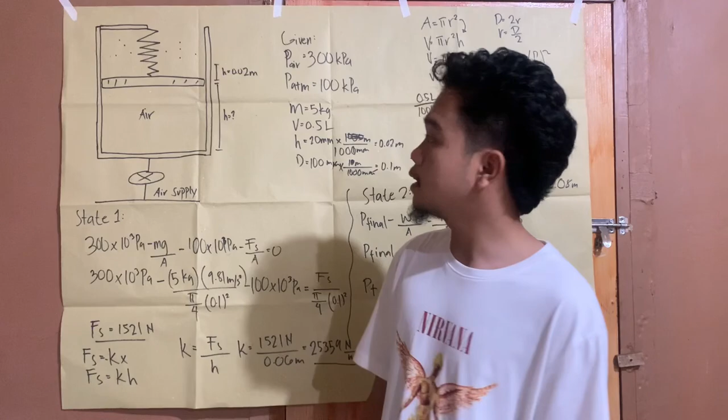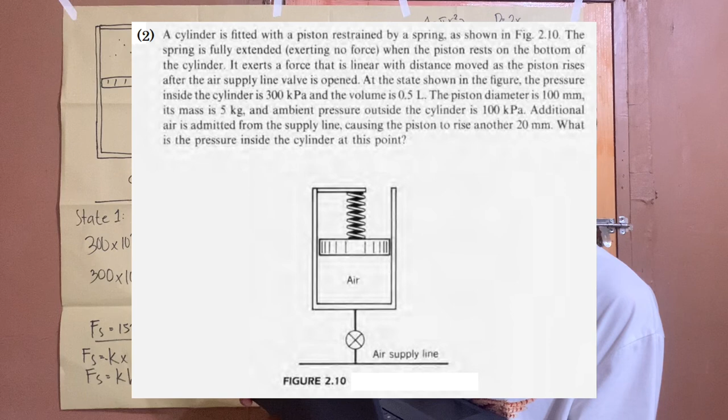In problem 2, here's the question: a cylinder is fitted with a piston restrained by a spring as shown in the figure. The spring is fully extended, exerting no force when the piston rests on the bottom of the cylinder. It exerts a force linear with distance moved as the piston rises after the air supply line valve is opened. At this state shown in the figure, the pressure inside the cylinder is 300 kPa and the volume is 0.5 liter. The piston diameter is 100 mm and its mass is 5 kg, and ambient pressure outside the cylinder is 100 kPa. Additionally, air is admitted from the supply line causing the piston to rise another 20 mm. What is the pressure inside the cylinder at this point?

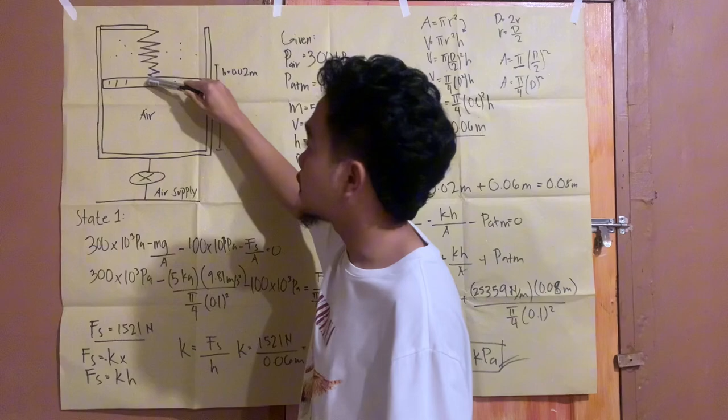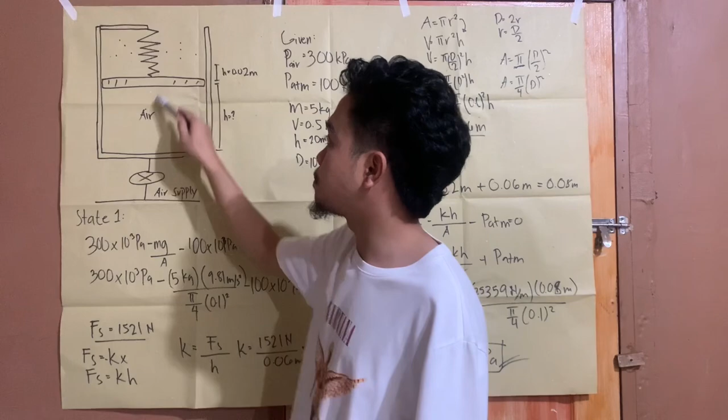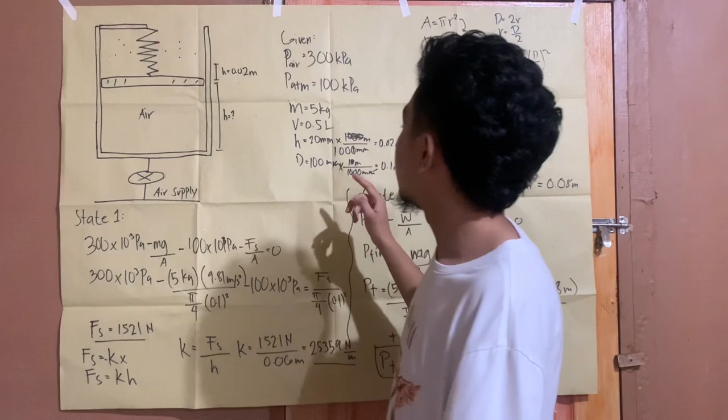Accordingly, in state 2, air is supplied again from the air supply, and the piston rises by 20 mm. What we need to find in state 2 is the final pressure.

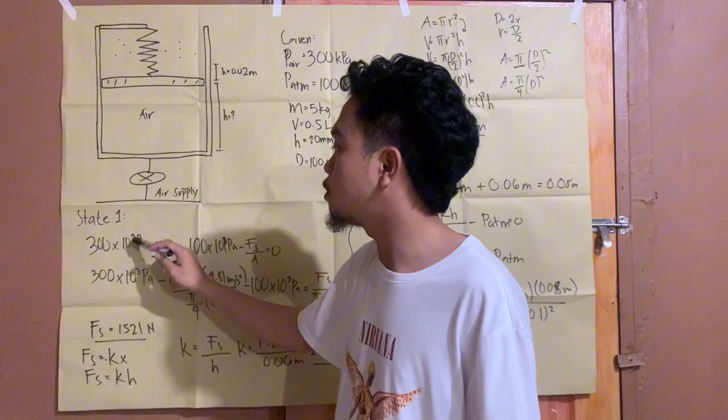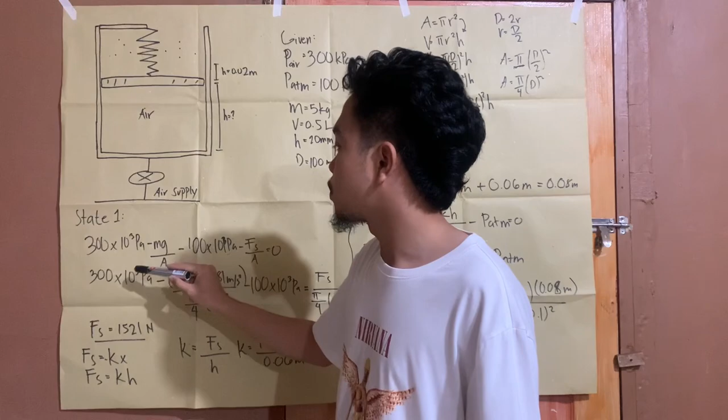So what I did here is convert the 300 kPa into pascal, multiplying it by 1,000 to get 300 times 10 to the 3 pascal, minus the mass - the weight, which is mass times gravity over A. Why over area? Because mass is in kilograms, gravity is in meters per second squared, over A which is meters squared.

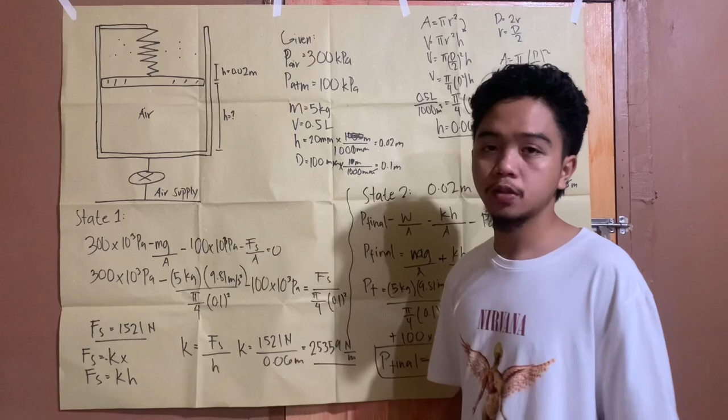So the resulting unit becomes Newton over meter squared, which is the unit of Pascal. That's why we put area in the denominator, to make the units and dimensions uniform. Minus the atmospheric pressure also exerted on the piston, which is 100 kPa, converted into pascal. Minus the force of the spring over area, since force equals Newton over area (meter squared), giving pascal.

So in the given, you can see the air pressure is 300 kPa, the atmospheric pressure is 100 kPa, the mass given is 5 kg for the piston, the volume is 0.5 liter, and in state 2 the added height is 20 mm, along with the diameter of 100 mm.

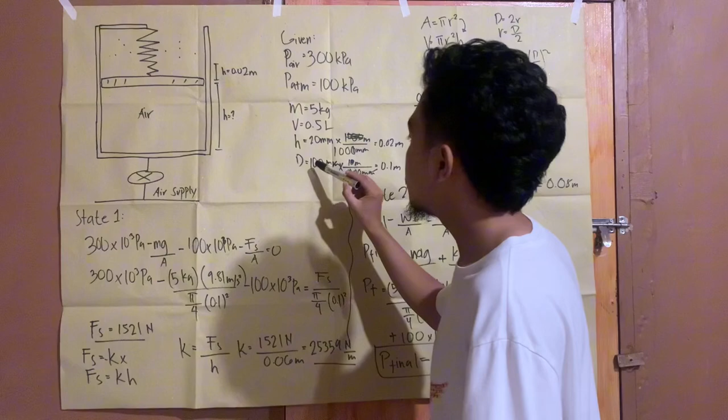We'll get the value of the radius. To get the diameter, it's equal to 2r. We manipulate that to get the radius, then substitute the value of r, which is d over 2. So the result is area equals pi times (diameter over 2) squared.

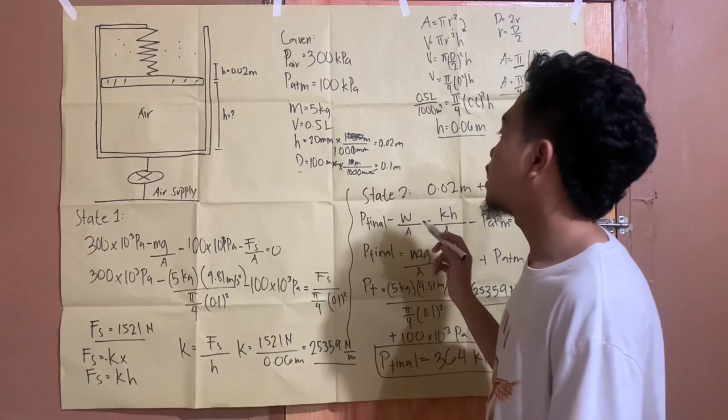So the area becomes pi over 4 times diameter squared. The diameter is given here, so we convert it into meters to keep the units uniform, giving us 0.1 meter. So now we have the area formula and the diameter.

Then we can plug in the given values.

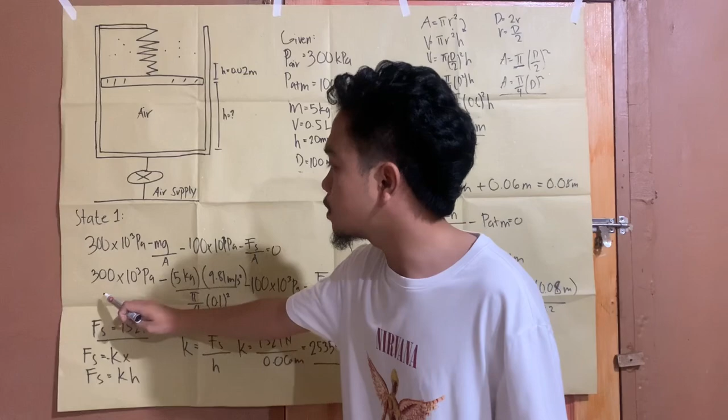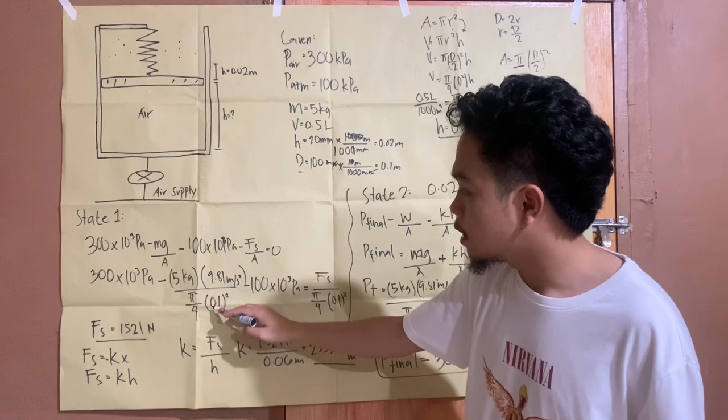So first is 300 times 10 to the 3 Pascal minus the mass, 5 kg times the gravity, 9.81 meter per second squared, over the area using the formula here, pi over 4, 0.1 squared, which is the diameter, minus the atmospheric pressure, which is 100 times 10 to the 3 Pa.

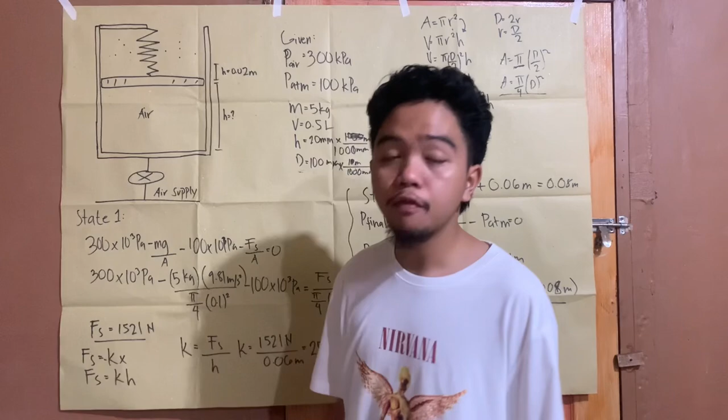Then we transpose the spring force since that's what we're solving for, over pi over 4 times the diameter 0.1 squared. So the result of that gives us the force of the spring, which is 1,521 Newton.

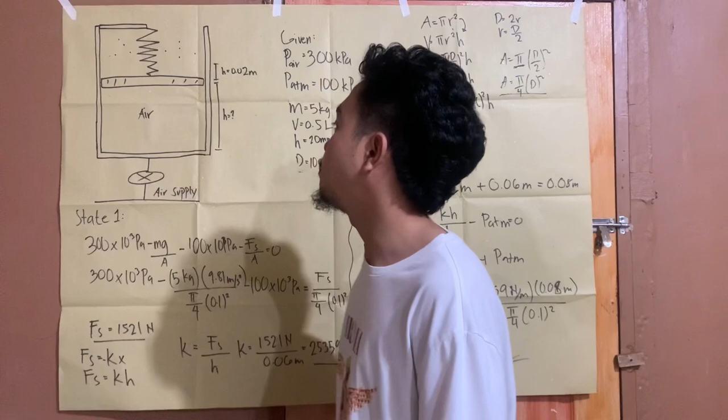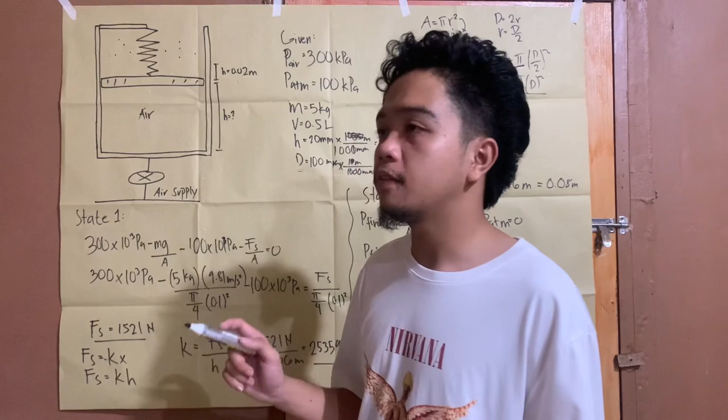We can use here the force equals negative kx, where k is the spring constant. We can also use the spring constant in state 2 because once we add the change in state 2, the 0.02 meter or 20 mm, we need the spring constant since that stays constant.

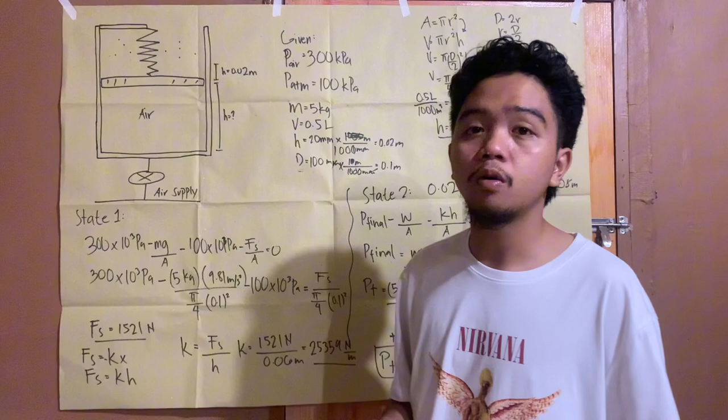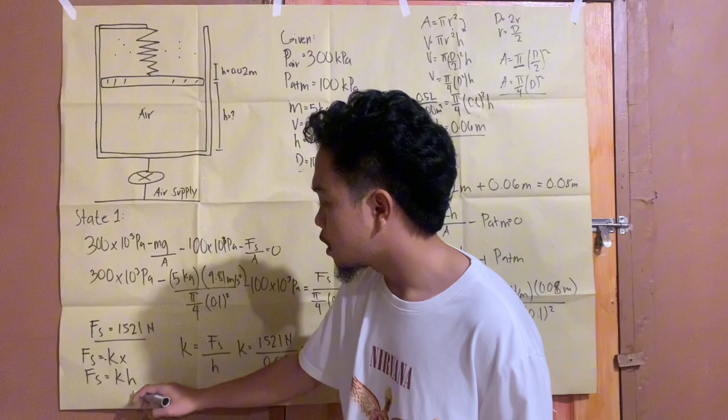So here, to get the height, which is x, let's replace it with h, the height. So the formula becomes spring force equals k, the spring constant, times the height. To get the height, we can use the given volume, the new one. The formula for volume is pi r squared h.

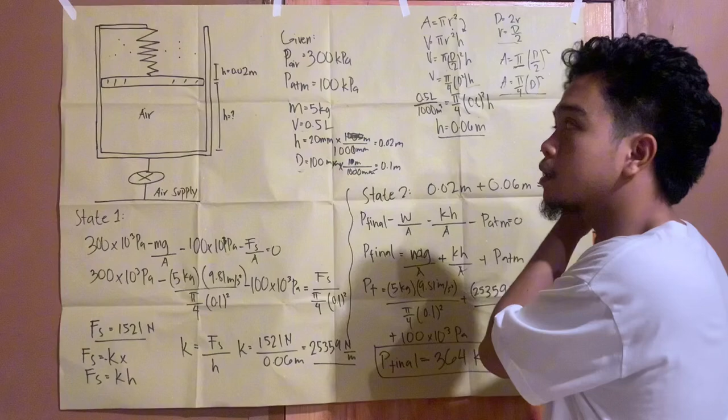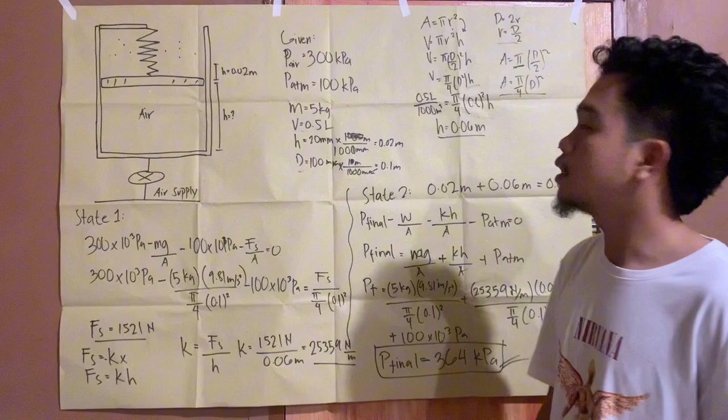But the 0.5 liter needs to be divided by 1,000 to convert to cubic meter so the units are uniform and consistent in dimension. So let's plug in the given values. You can shift-solve this on the calculator, and the result is 0.06 meter, which is our height here, 0.06 meter.

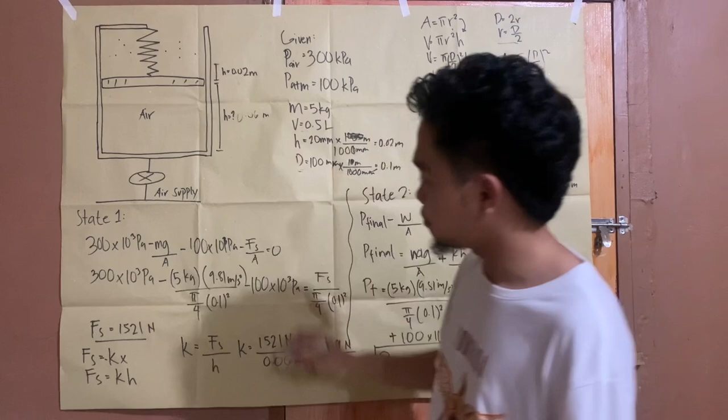So now we can get the spring constant. Let's manipulate the formula: k equals the spring force over h. We already have the spring force and the height, so let's plug them in, and the result is 25,359 Newton over meter. That's the unit. So now we have the spring constant.

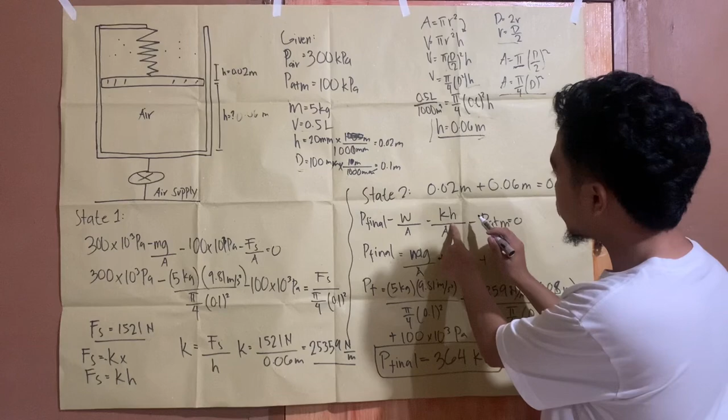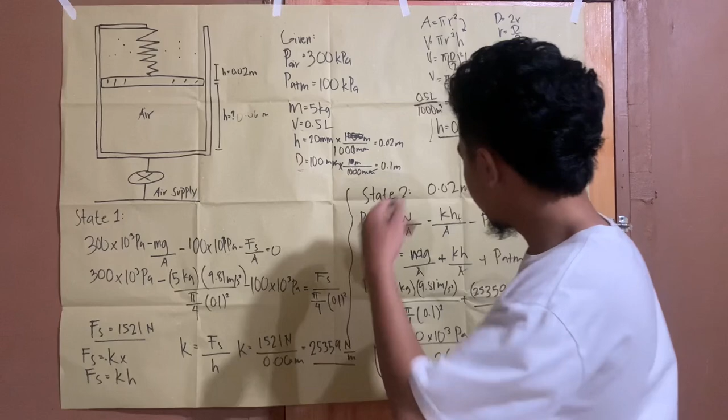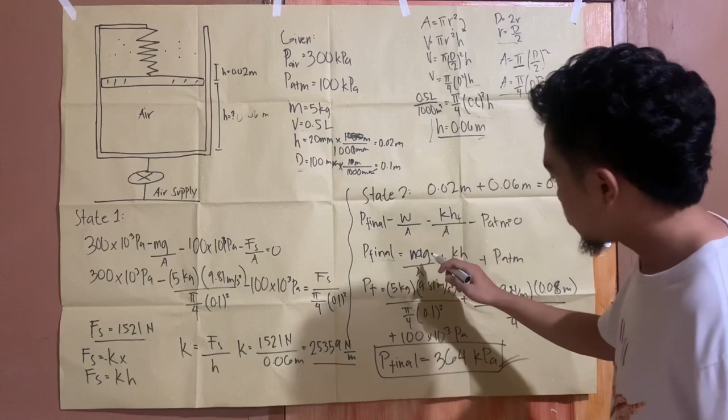So to solve this, let's transpose the other terms so only the final pressure remains: mass times gravity over area, plus k, the spring constant, times the final height over A, plus atmospheric pressure. Let's plug in the given values since we have them all.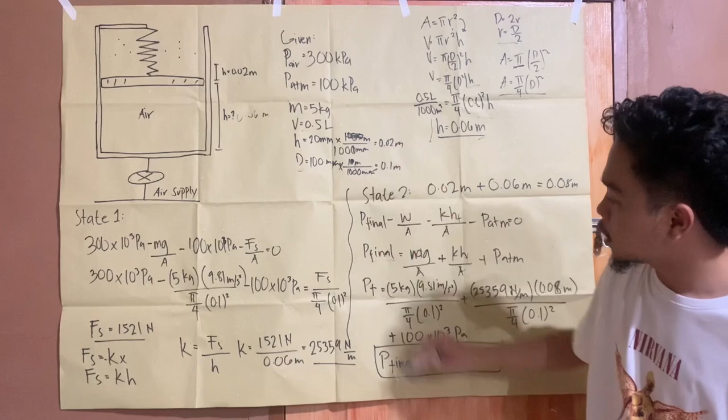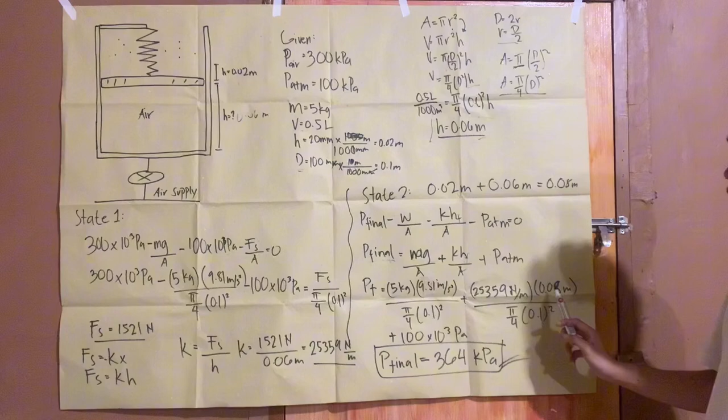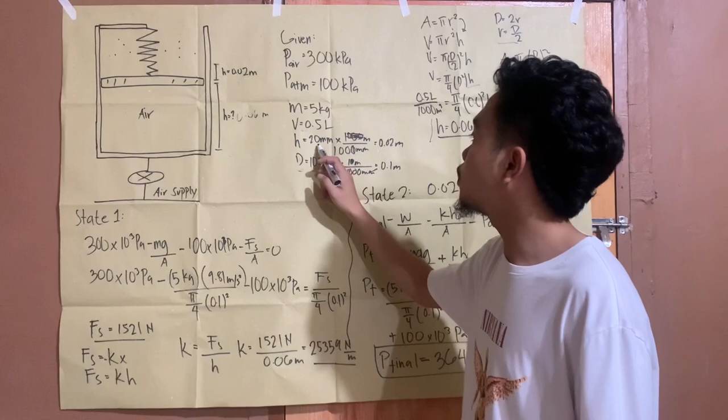So: 5 kg times 9.81 meter per second squared over pi over 4 times 0.1 squared, plus the spring constant times the final height, which is 0.06 plus 0.02 meter. I converted the 20 mm into meters, then added it: 0.02 m plus 0.06 is equal to 0.08.

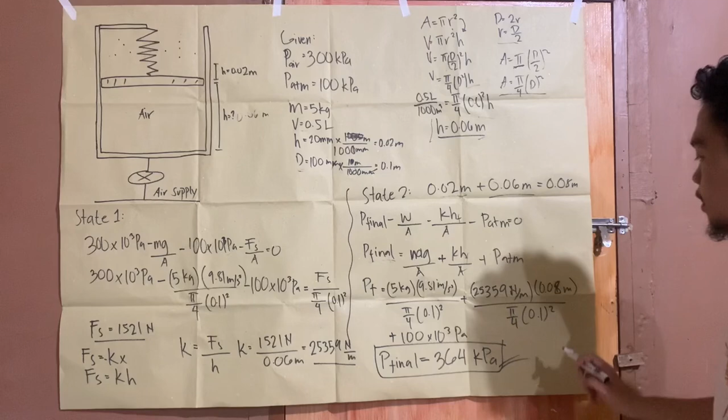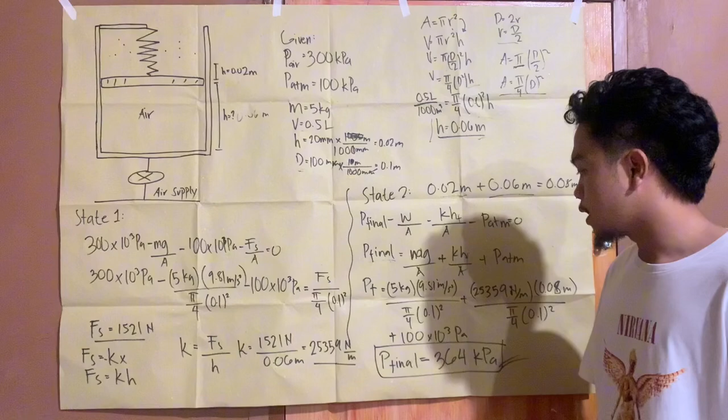So we plug that in, over pi over 4 times 0.1 squared, plus 100 times 10 to the 3 Pascal. When you put that in the calculator, you get the answer, the final pressure equals 364 kilopascal. So that's the answer.